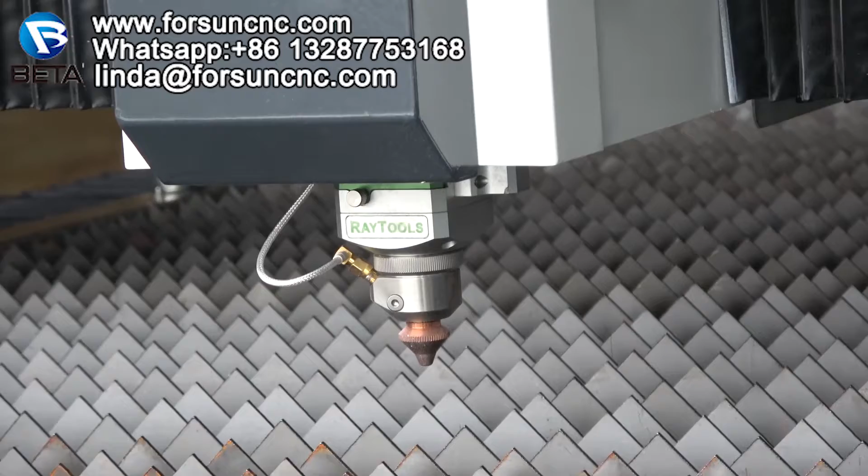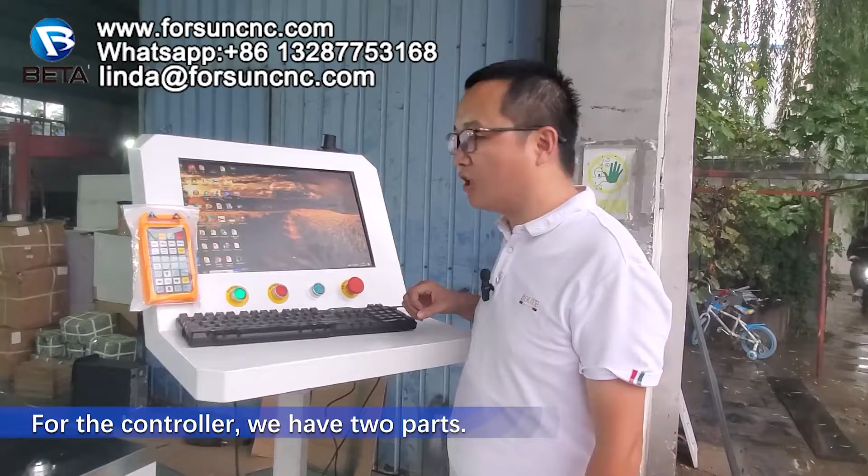First, I will introduce the controller to you. For the controller, we have two parts. One is a controller in the computer, another is a remote controller. For the controller, this is a CypOne we use. We can see here, CypOne 6.1.

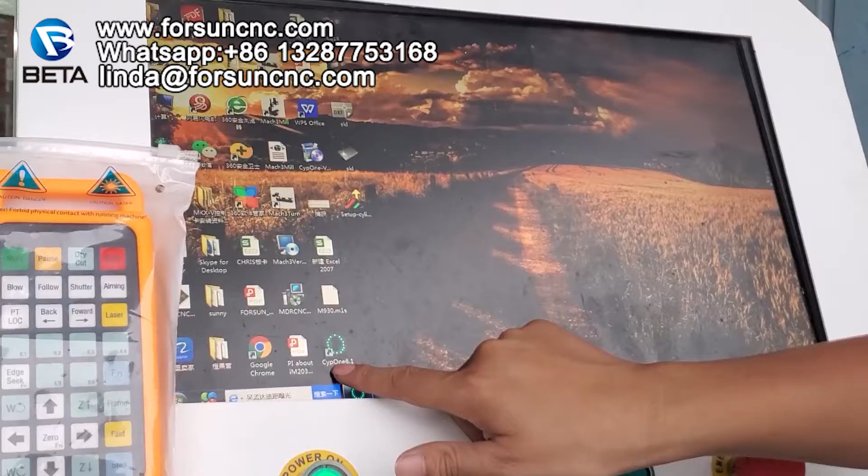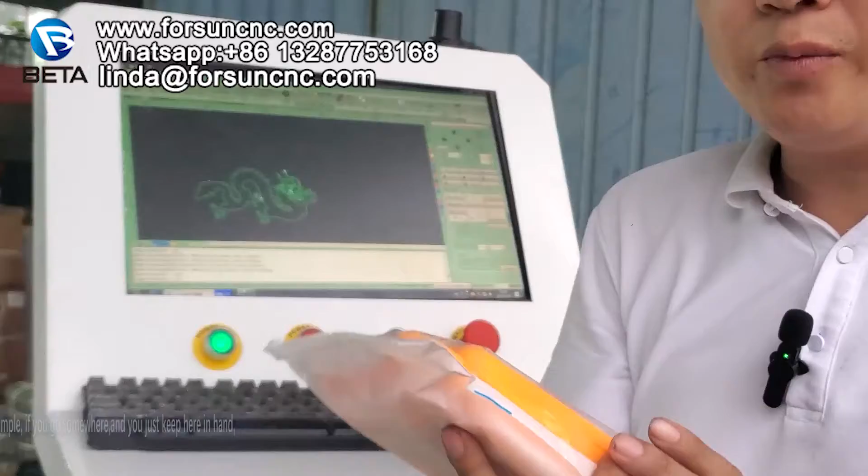This is a controller. When we open it, it will look like this. And this is a remote controller. If you go somewhere, you just keep it in hand, then it is okay. But make sure there is a Wi-Fi connection to the controller. This one will connect to the computer. Then this one can be used.

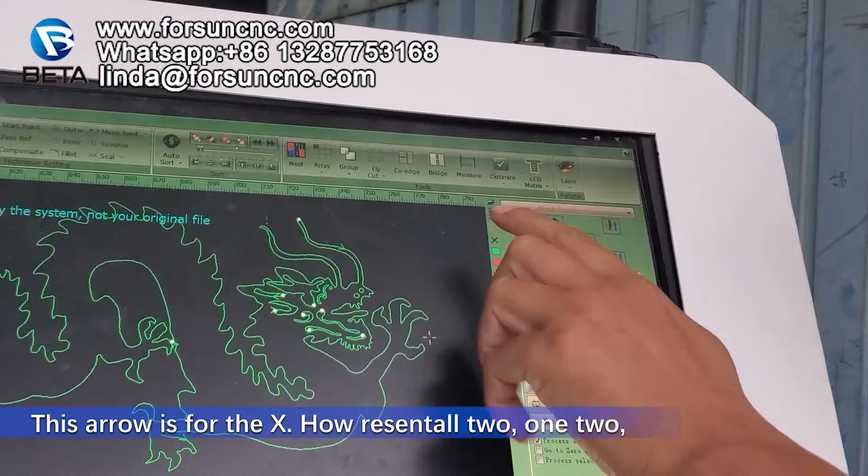Now let me introduce the controller and how to use it. First we can see here, we have 4 arrows. This arrow is for the X, the horizontal 2, it's for the X. The vertical 2 is for the Y. And here is for the Z. These 2 are for the Z.

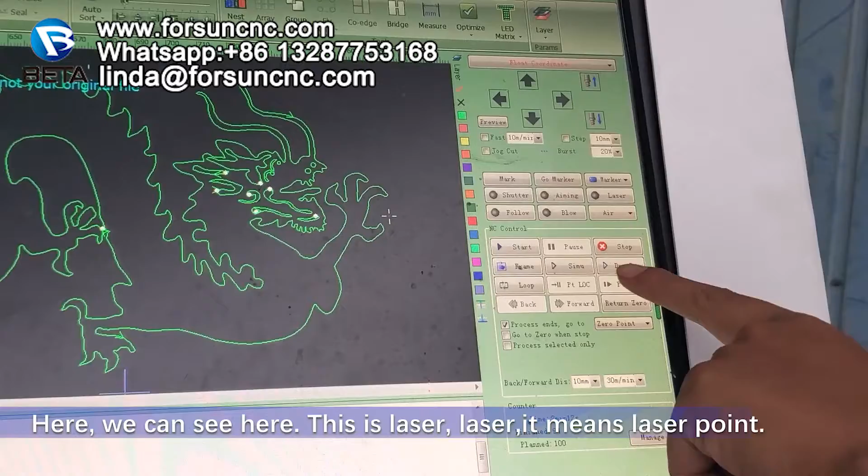Here we can see, this is laser. Laser means laser point. Follow - when we push follow, the laser head will go to the position where it will cut. Blow is for the air blow. And here is start, for the program start.

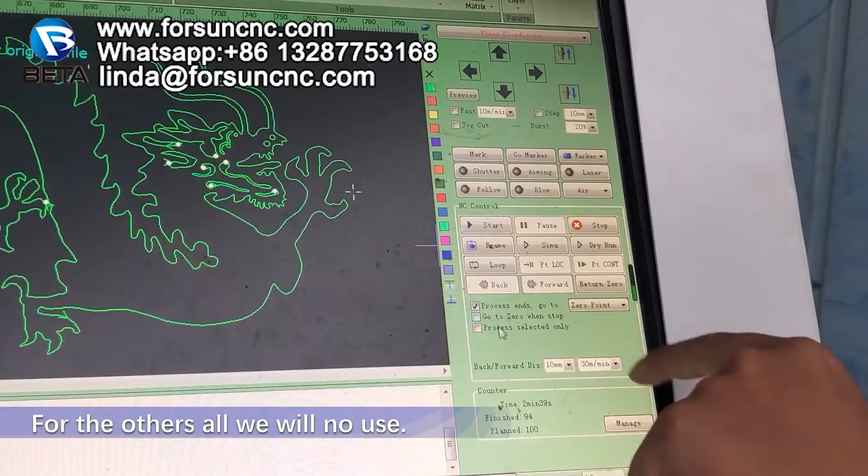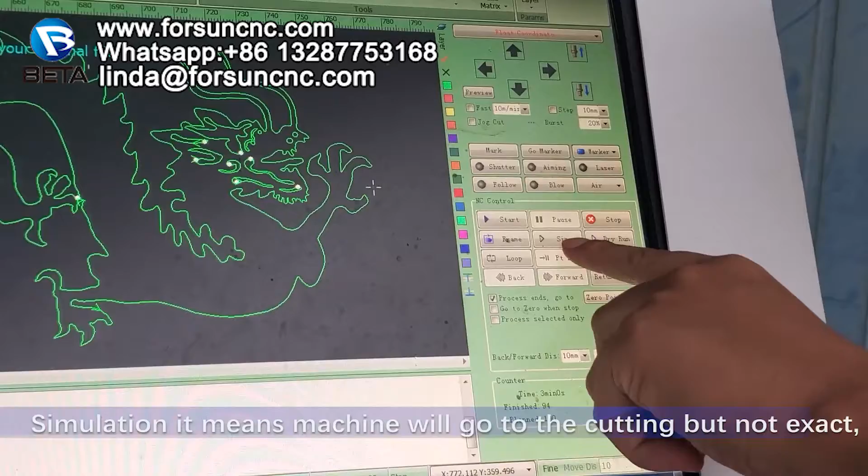For the others, always no use. Here we have one frame. We can see frame. When you press frame, the machine will move to the frame first, to check whether the cutting material is out of the space or not. This one is a simulation. Simulation means the machine will go through the cutting motion, but not exact, just for checking.

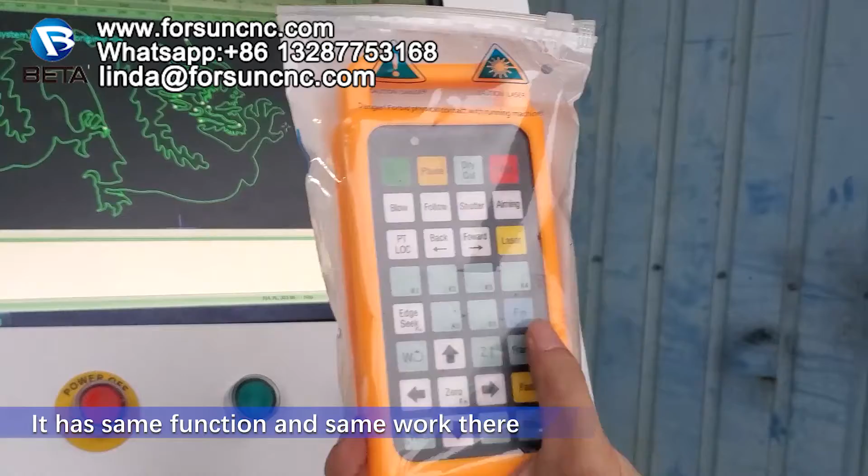Same thing for the remote controller. It has the same function and the same work there.

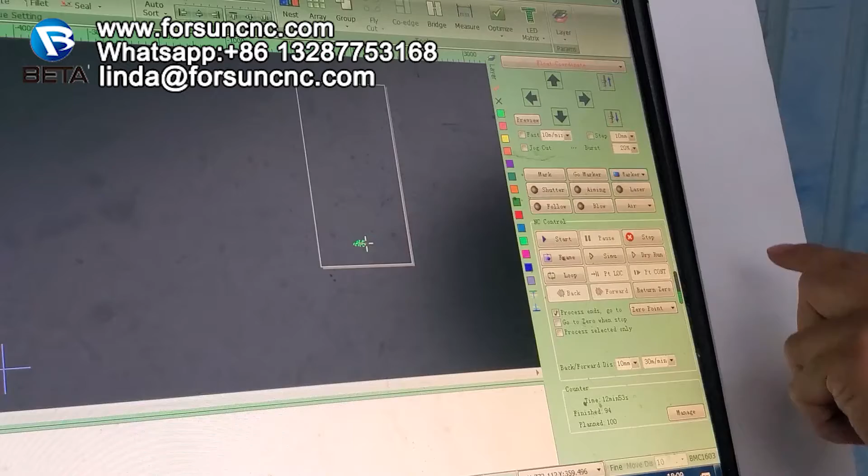Here I want to introduce the marker, especially. For example, when you work on one plate or several plates, you need several working start points. Then we use the markers. When we open it, you can see there are 6 marks. 6 marks means 6 working start points. That means you can set 6 working start points there: 1, 2, 3, 4, 5, 6.

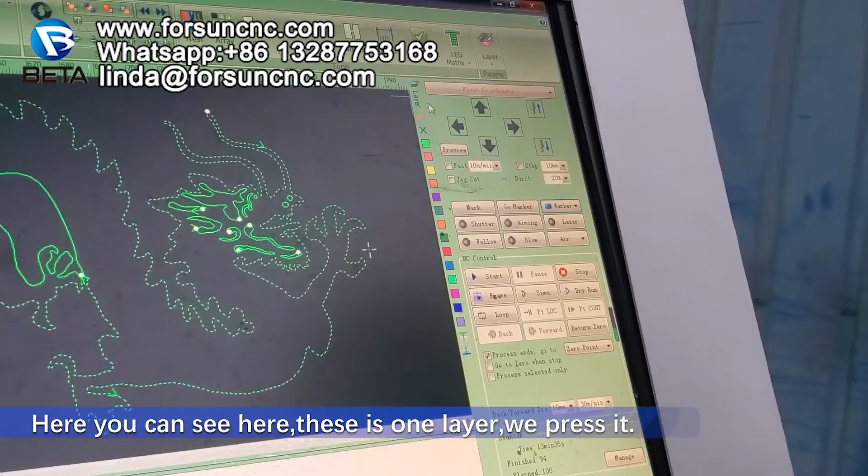You can see here, there is one layer. We press it, we press here. Here has a layer, you can see here, cut speed. Here we usually need to set it. And here is lift height - here no need to set. When you cut different thickness, you need to set different cut speed.

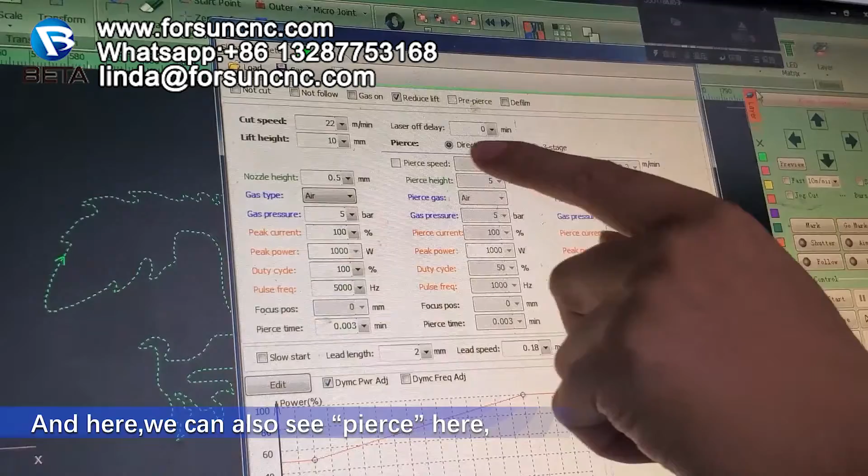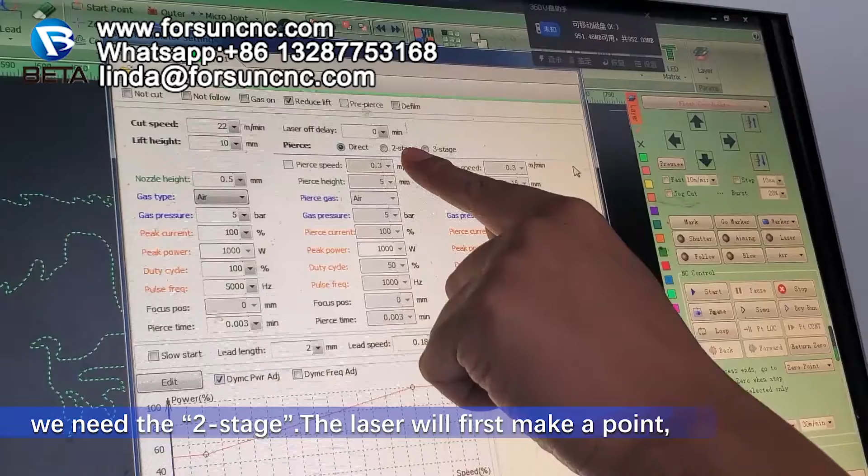Here we can also see pierce. For very thin material like 1mm, 2mm, something like that, we use direct. But if we cut thick materials like 5mm steel, we need the 2-stage. It means the laser will first make a point there, then second cutting. If 10mm or something like that, we need a 3-stage, meaning the laser will work 3 stages first.

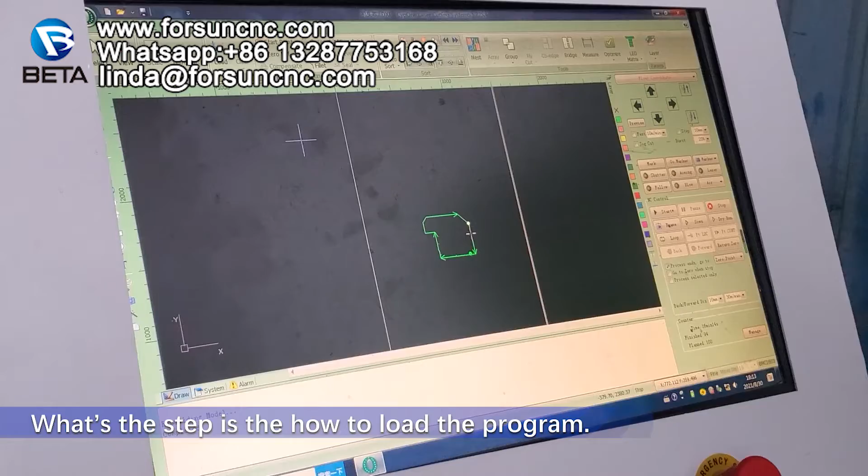The next step is how to load the program. For this controller, you usually just use the DXF format, that is okay. For example, the file first, then we find it in the files. For example, this one - this is the file we need to cut.

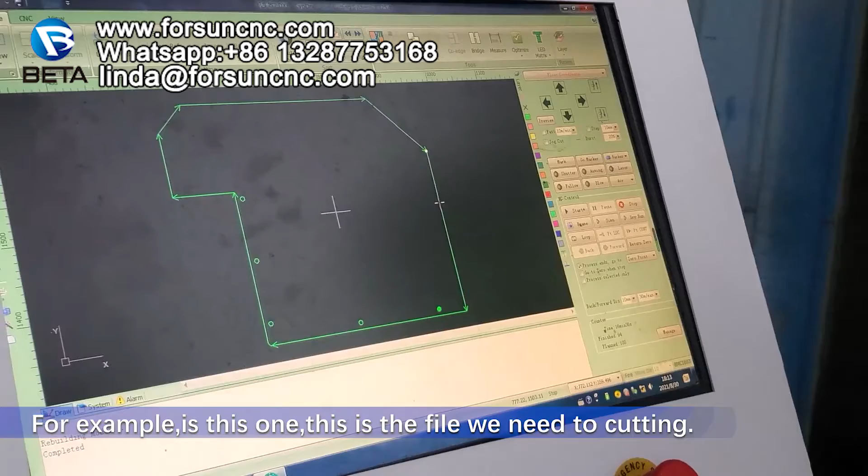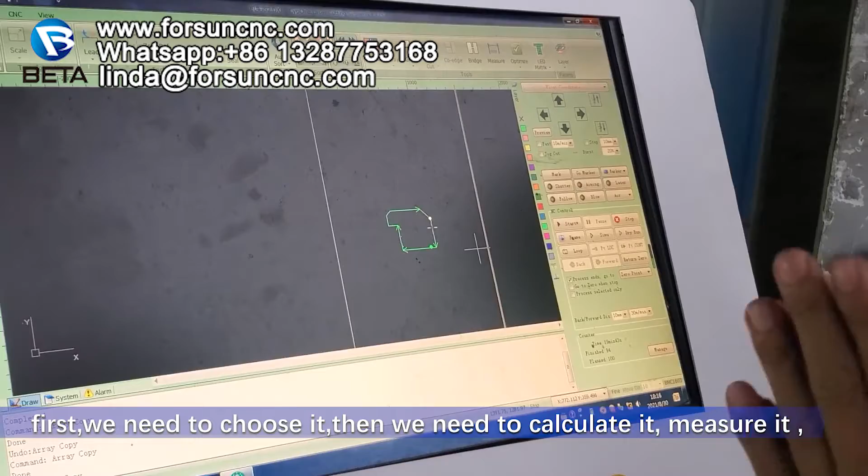For example, this cutting, we need to cut a lot in one plate. Then how to do it? Let me teach you step by step. For example, we cut this cover just now, we just load it into the controller. First, we need to choose it. We choose it, then we need to calculate and measure it.

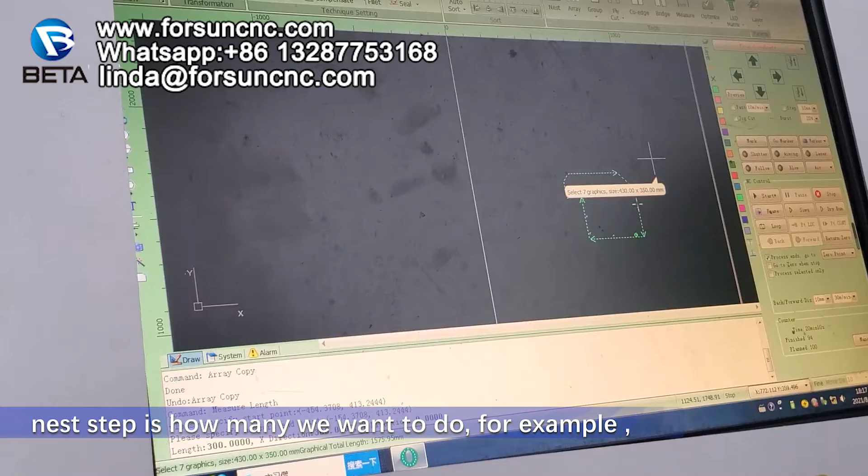Is it correct or not? Measure. You can see we can measure it. The measure here, there is. If it is correct, then we continue to the next step. Next step is how many we want to do. For example, we want to cut 16. We choose the array.

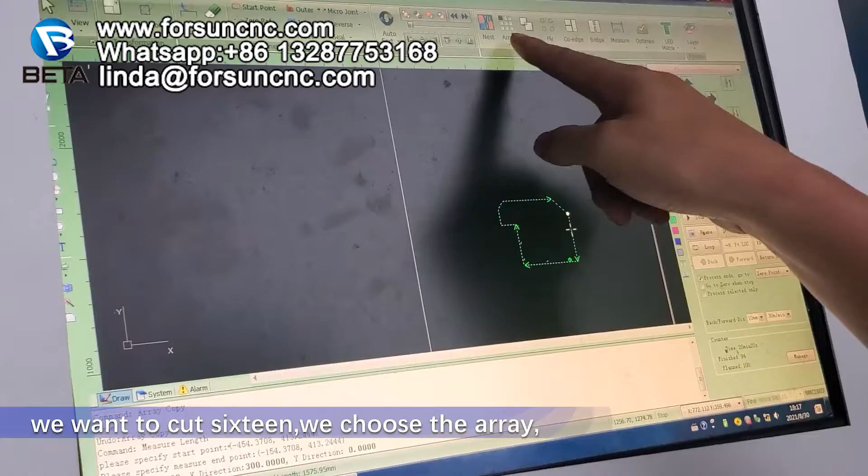Okay, 16. It means row 4. This one also 4. 4 by 4. It is 16. Okay, you can see now it is 16.

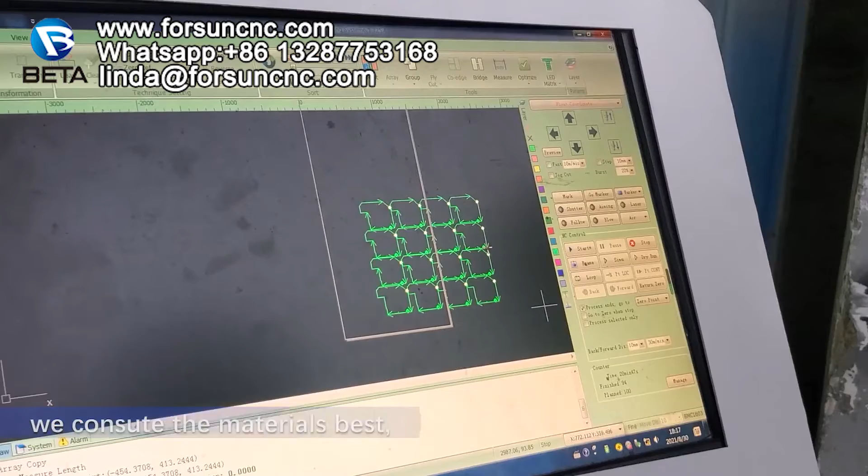Then we do the nesting, because how many plates we need and how to cut, we can save the materials is the best. We choose the nest.

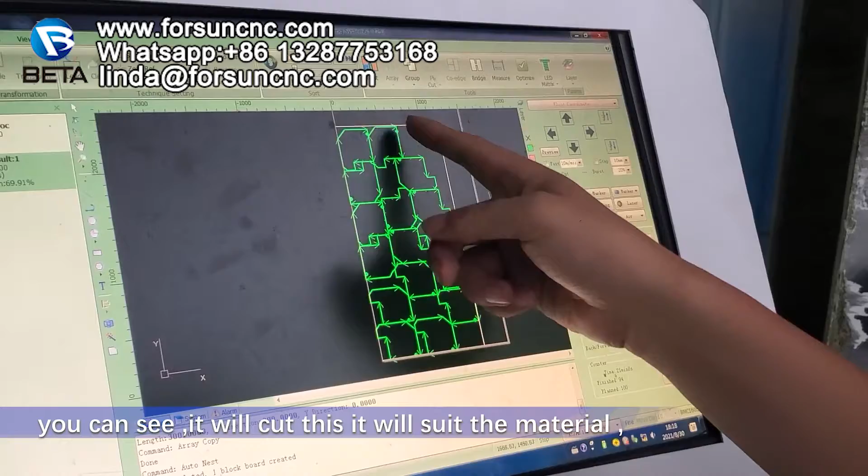For example, if our material is 1.2, 2.4, this is our material, then we just press OK. Then you can see it will cut like this. It will suit the material. It will cut like this. It is a nesting function.

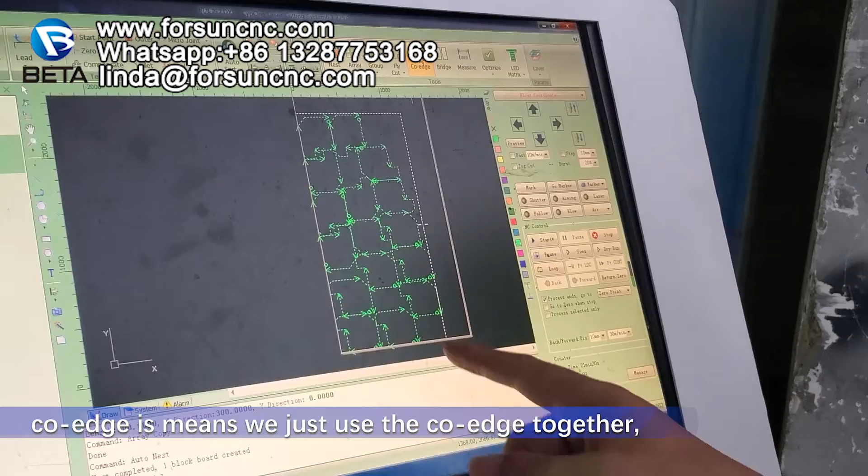And here we also want to show you two things. One is a bridge, one is the co-edge. Co-edge means we cut just using the edge together.

You can see here, nest completed, one block board created. It will use the co-edge together. Here is the bridge. Bridge means it will connect there a little.

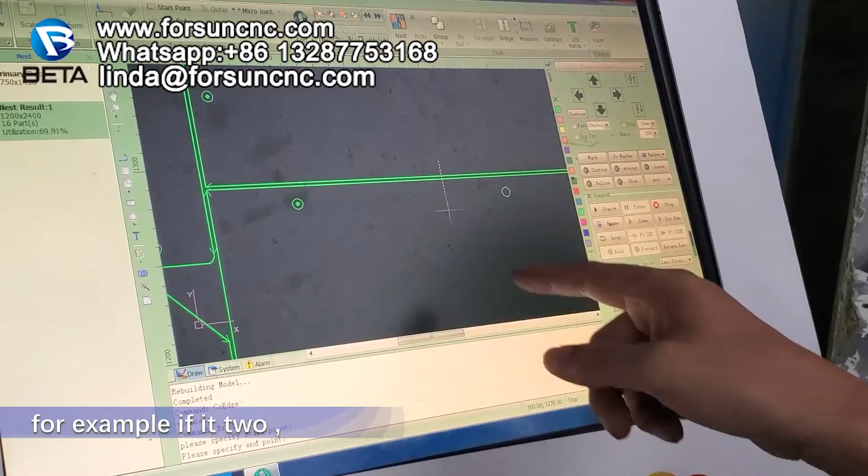For example, if these two, we don't want them to cut down, we need to have one bridge. Then you can set some parameters here. We press OK. Then it will be bridged there.

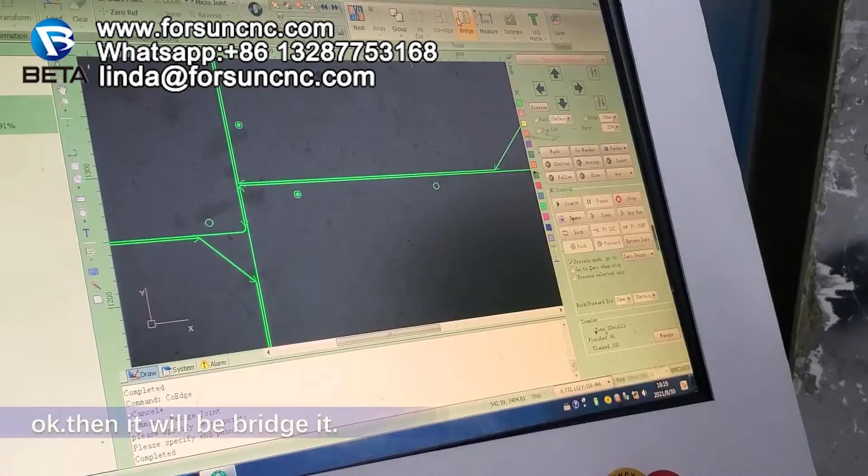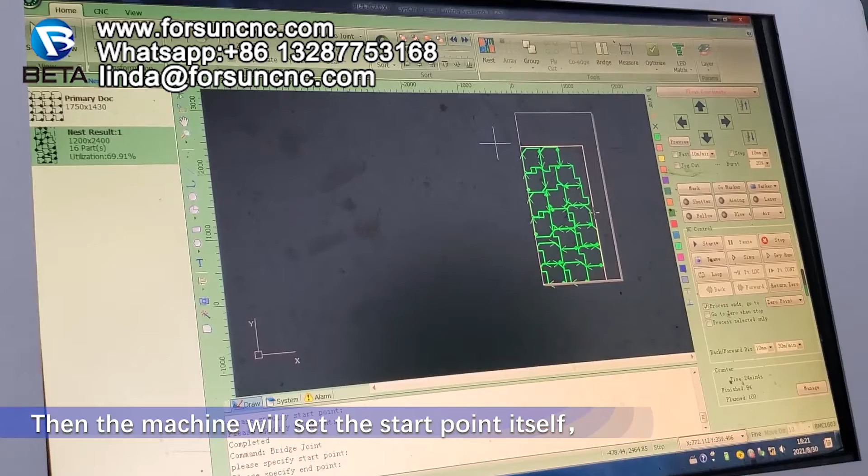For the fiber laser machine, if you just need one working start point, then no need to set manually. For example, if we want to cut this plate, we want to cut here, then we just move the fiber laser head to be here, and then we press the frame.

Then the machine will set the working start point itself. Of course, if you want to set some other working start point, for example 5 or 4, just use the markers. Later, I will introduce to you.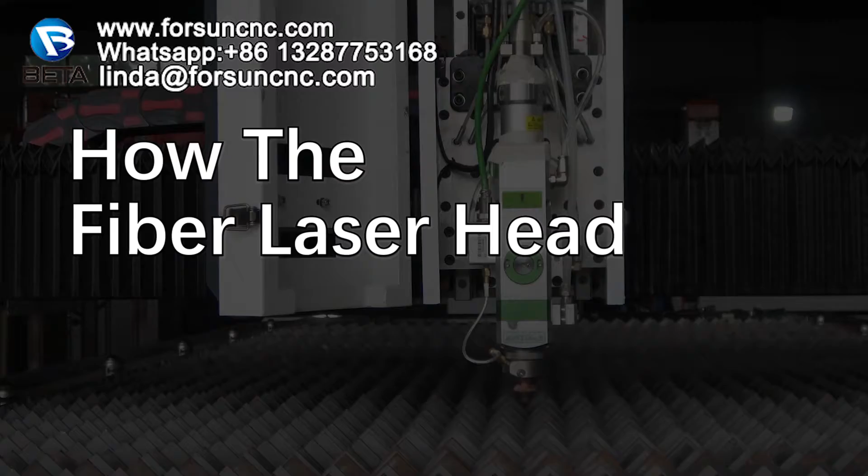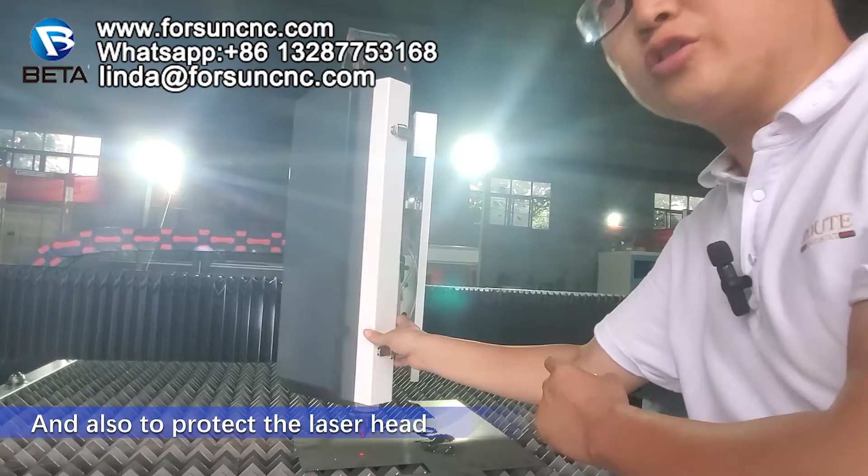Now let me introduce the fiber laser head to you. Here, this is the fiber laser head. We made one cover for you for a pretty outlook and also to protect the laser head. When we open it, you can see.

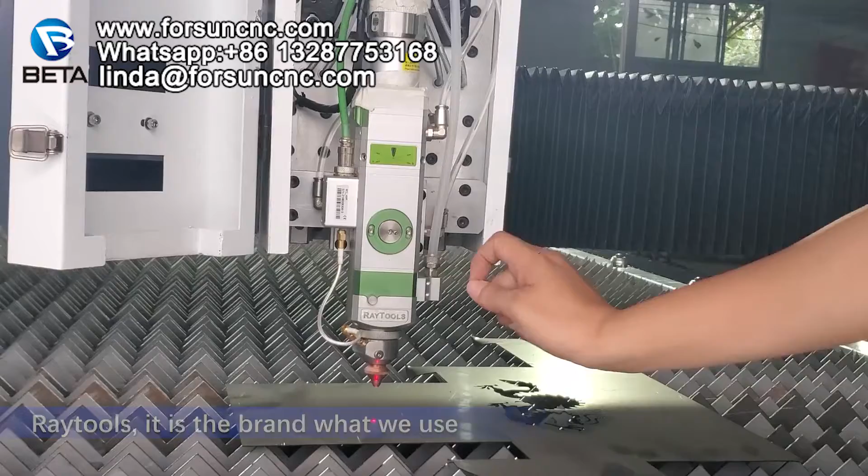Here we use the Raytools. This is the brand we used. And here you can see, here is one tube, this is for the air tube. And these tubes, others are for the water tubes.

Here has one electrical cable, it connects to here. This equipment is for the height adjusting. For example, if the plate we put here may be bent like this or like this, not flat, the laser head will adjust the height itself by this one.

And here we also have the red dot. Red dot position means the laser will cut here. The most important thing is here, this one.

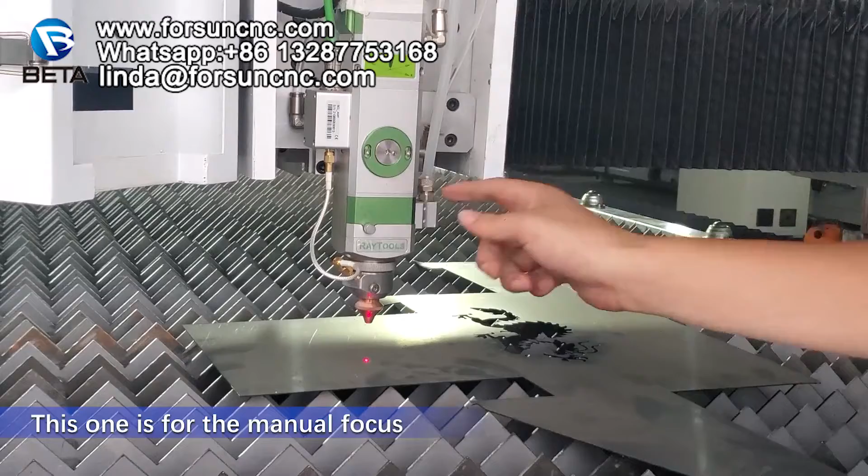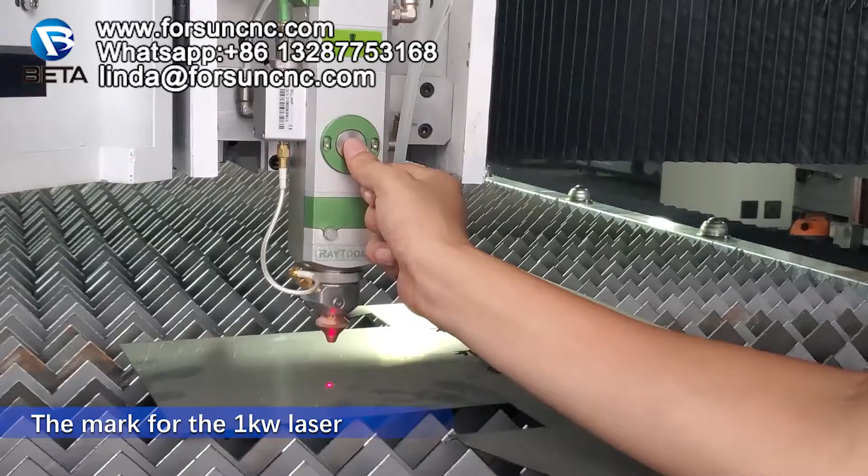This is the focus, this one is for the manual focus. Usually there is one mark here. You can see there is one mark, see clearly, one mark. The mark for the 1 kilowatt laser, when it is at 0...

it means we cut the 1 millimeter for the best effect. For 1.5, you need to adjust to 0.5 or something like that. But it's better you test yourself and adjust according to the exact situation.

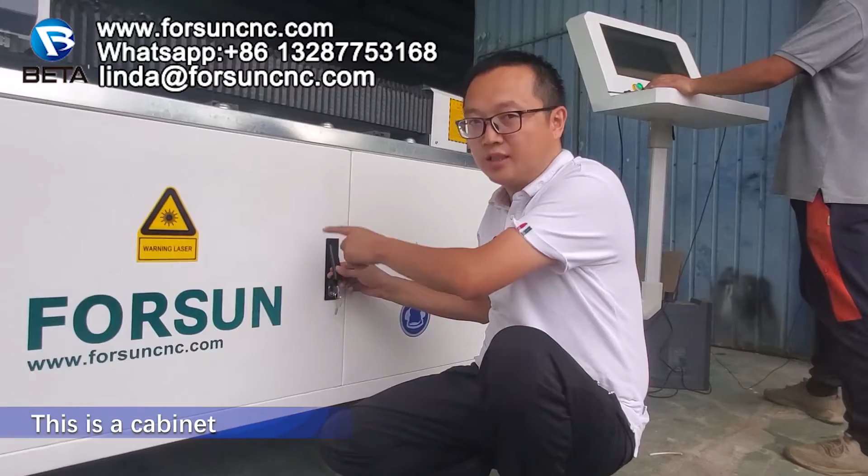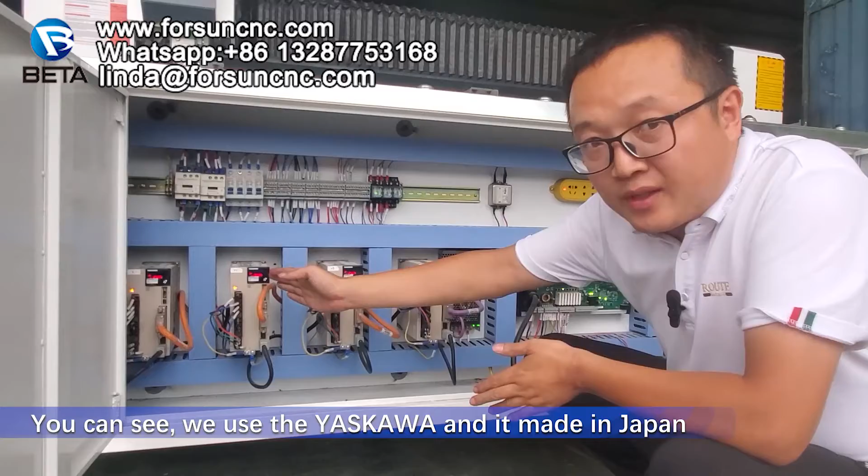Now I will introduce our cabinet inside. This is the cabinet. This is our cabinet inside. You can see we use the Yaskawa made in Japan, and also the Schneider spare parts.

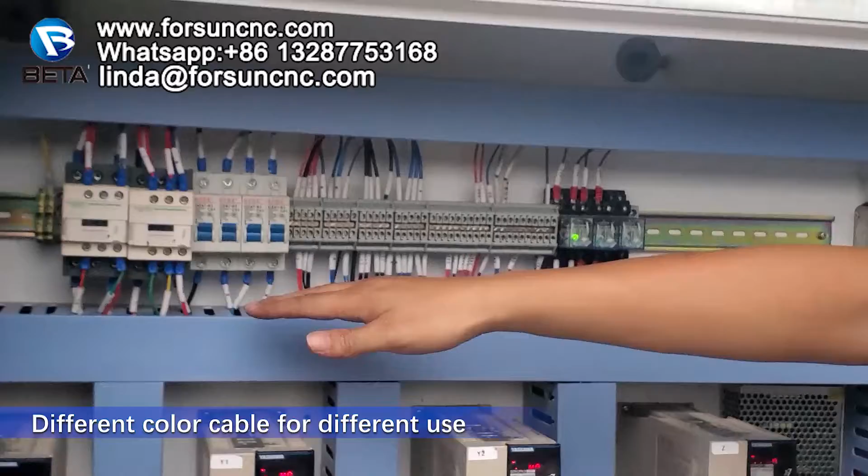It's made from France. You can see for our machines, different color cables are used for different purposes. The light green, yellow, red, black, different colors for different uses.

This kind of color coding is used for American, Canada, UL standard, and also for the CE standard in Europe. And also for each cable we have English writing there. You can see every cable we have English writing.

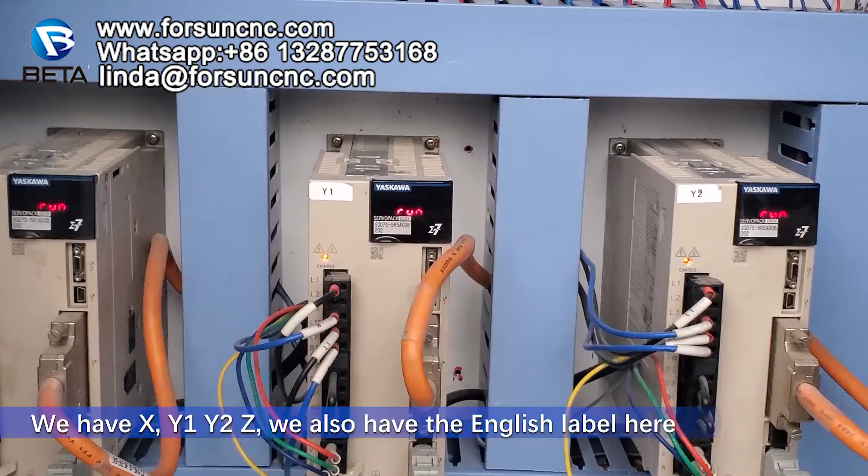And also for the Yaskawa, we have the X, Y1, Y2, Z, we also have English labeling there, for the customer to easily understand and find the problem.

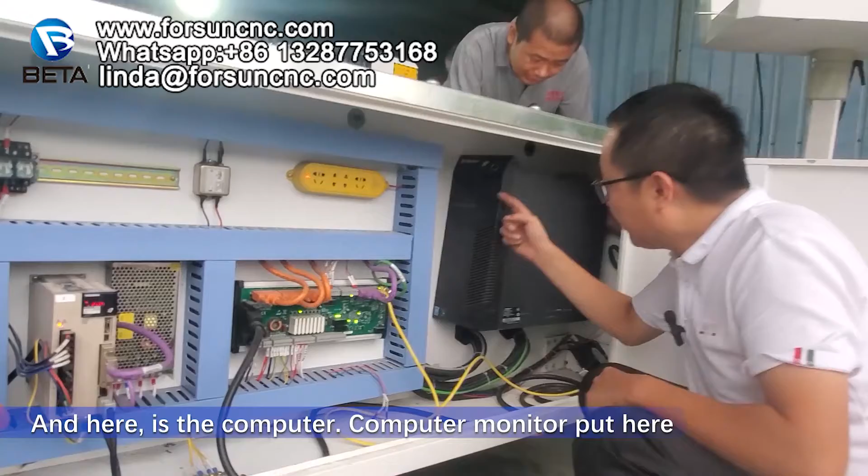This part here is for the controller. This here we make one plug for you, which you can use for the computer or something else. It will be easy for the customer to connect the power. And here is a computer monitor, we put it here to save space. Then it will be much easier because the controller also has the computer buttons.

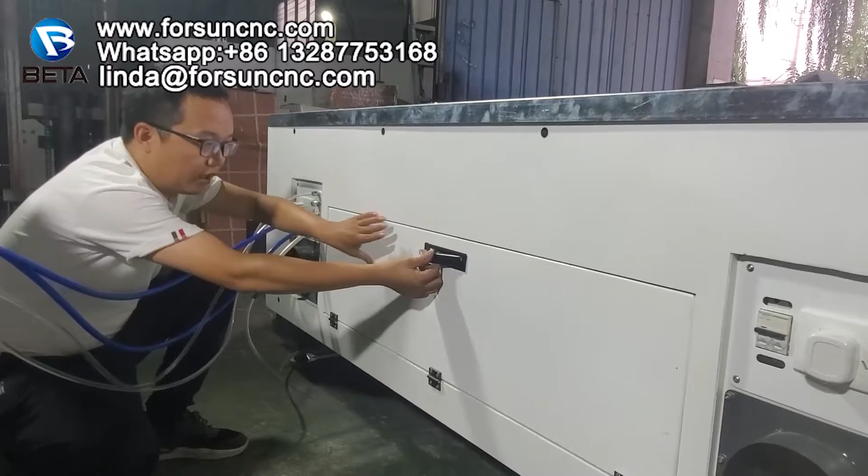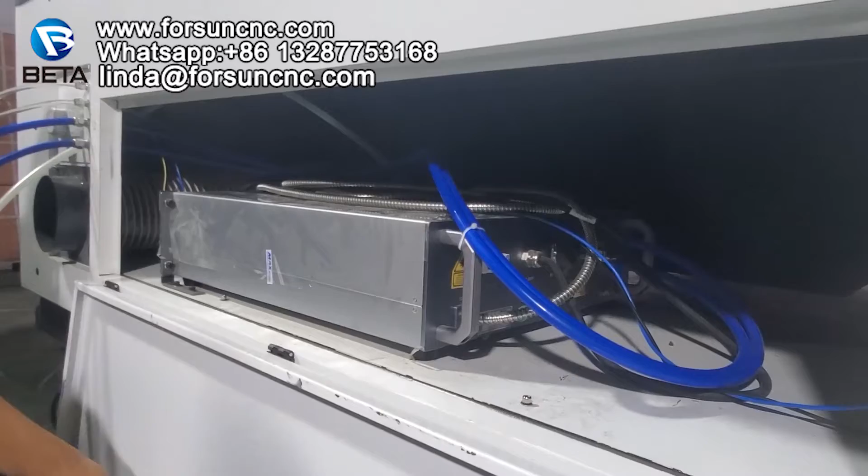Okay, here we make one cabinet. This cabinet is for the fiber laser source. We put the fiber laser source here to save space and for more safety, because the fiber laser source is very expensive. If we put it outside, it is easily broken manually. And here we also can keep the dust off to make it clean, so we put it here.

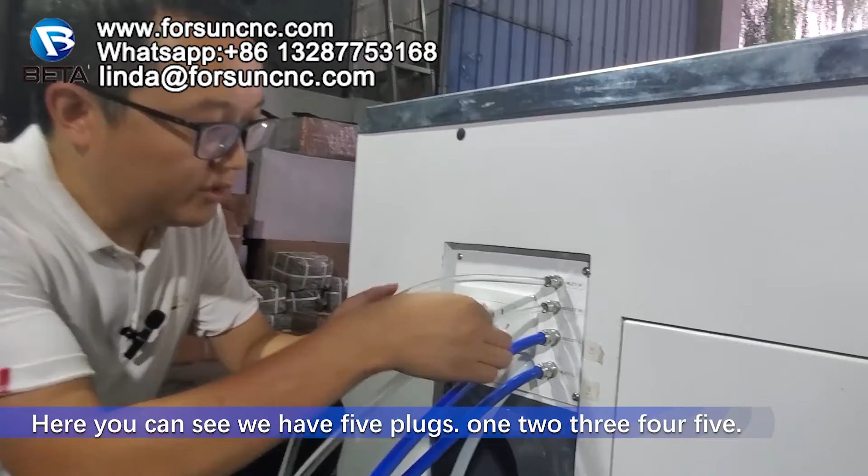Here you can see we have 5 plugs. 1, 2, 3, 4, 5. The first 4 are for the water, connected to the water chiller. And this one is for the air pump, connect to your air compressor or air tank. Usually the air pressure is 1.5 MPa. Connect to your air compressor. And here, these 4 connect to the water chiller. Later, when I introduce the water chiller, I will tell you how to connect.

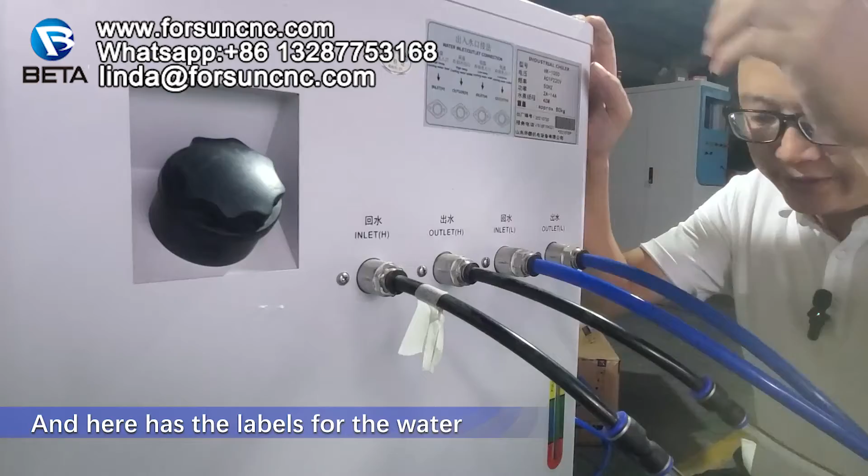This is the water chiller, used for water cooling for the fiber laser. And here is the water inside - we put water from here. And here has the labels for the water. You can see there are 3 colors: the red one, green one, and the yellow one.

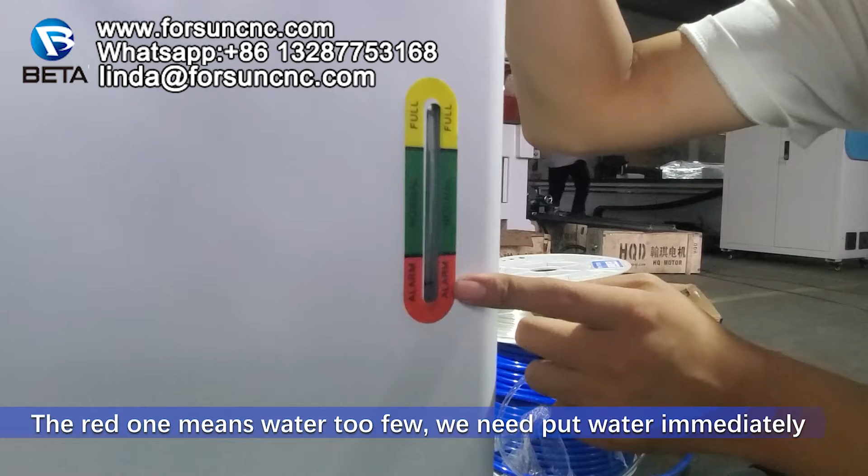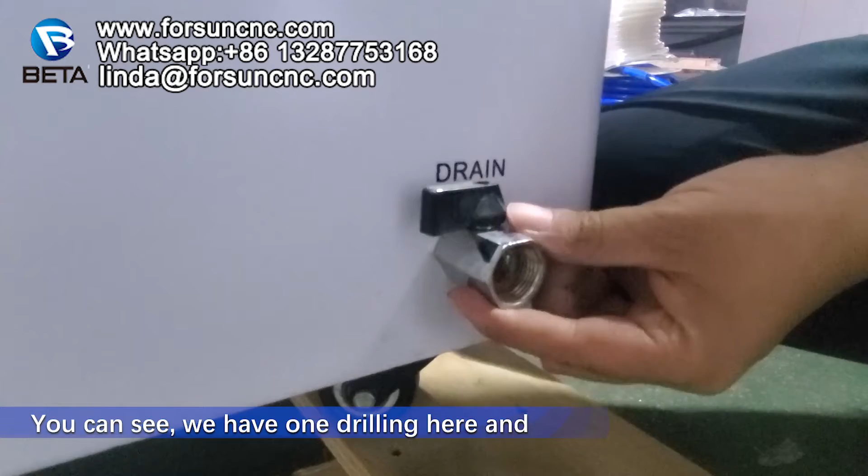The red one means water too few, we need to put water immediately. The green one means the water is okay - we must make sure the water is always on the green side. The yellow one means the water is too much, we need to make some water come out. How to make it out? Here you can see we have a drain to make the water come out of the chiller. Okay, now let's go back to here.

This is the most important part for the water chiller. You can see we have 4 plugs. 1, 2, 3, 4. The first one is inlet water. Second one, outlet. Third one, inlet. The fourth one, outlet. Let me show you how to connect it.

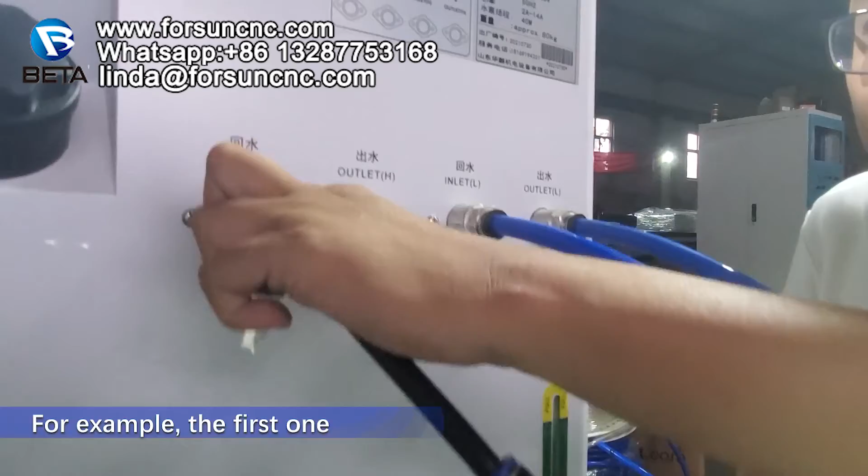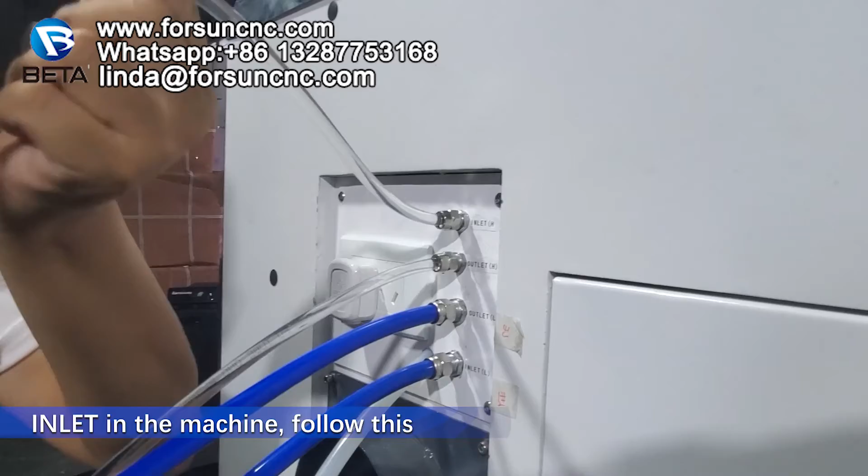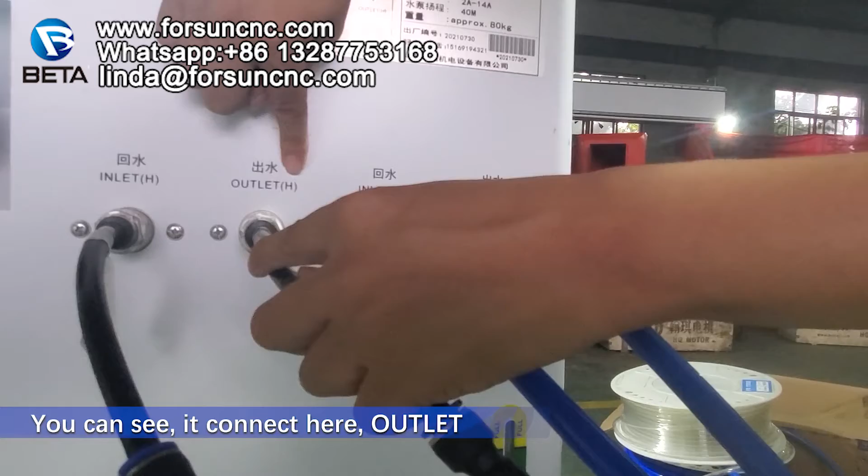For example, the first one, inlet in the water chiller, will connect to the outlet in the machine. Let's follow this stream - you can see the second one, outlet water. The same way, the first one is inlet in the machine, and it will connect to the outlet to the water chiller. Inlet on the machine, we follow this stream - you can see it connected here, outlet. The same way, this one is inlet on the chiller, and it will connect to the outlet in the machine. And the outlet in the chiller will connect to the inlet on the machine.

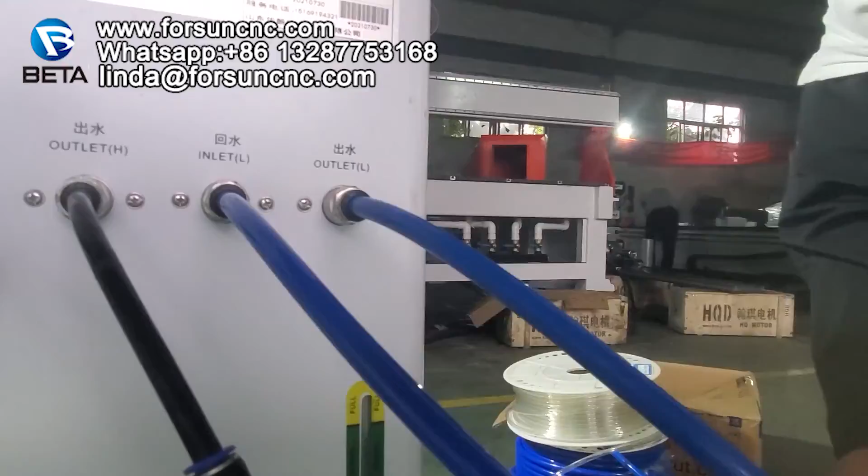Same way, here we have one tube, some plugs, and also one switch. Let me introduce to you what it is for. Here is a general switch, it is for the general power of the machine. If we put it down, it will power off the machine. Put it up, it will keep the machine powered on.

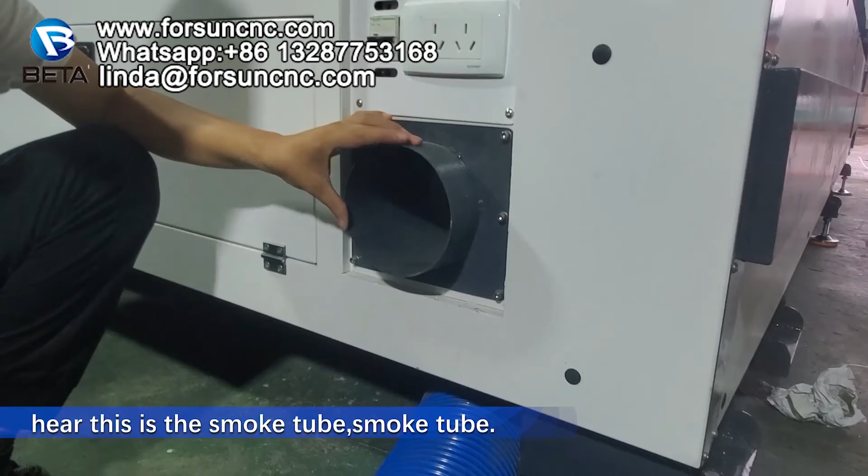Here, this is the smoke tube. This tube is for draining the smoke out. You can see here we have the air fan - now follow here.

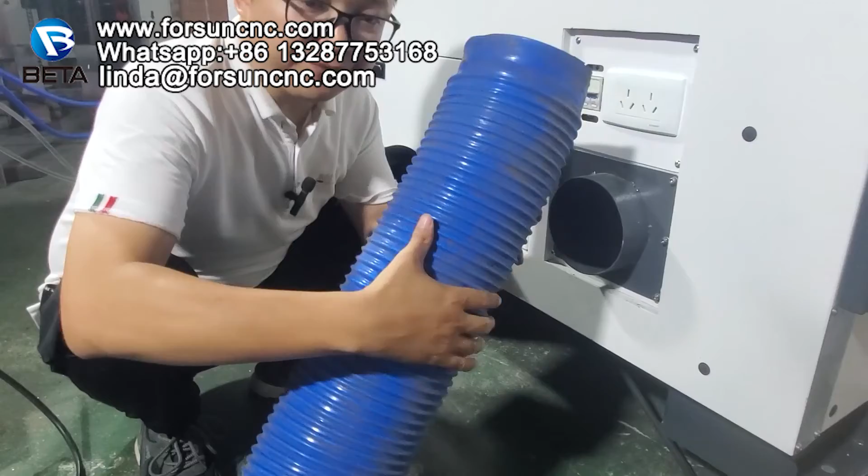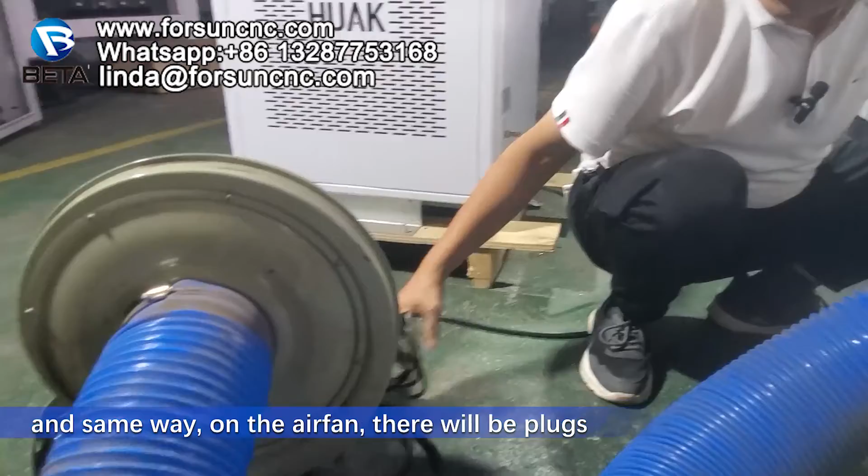You can see, okay, it will connect to here. When the machine is working and there is a lot of smoke, the air fan will work and take it out. The same way, on the air fan there will be plugs. This plug will connect to here. It's okay.